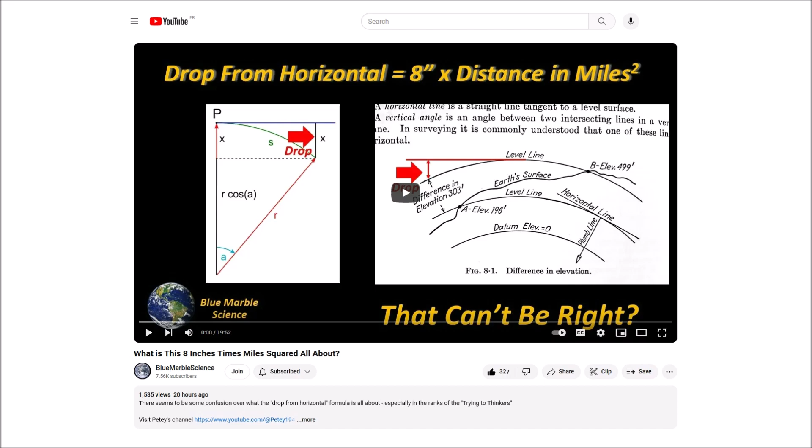Okay, so we're back to the half mile. Well, if you add those two together, you end up with 4 inches. But if you start from one point and go the whole mile, you have 8 inches. So that's a good point, whoever said that. I think it might have been me.

Uh-oh. Bev's trying to pull into the lead here. He said something incredibly stupid, and he's so proud of it, I'll bet he plays it again.

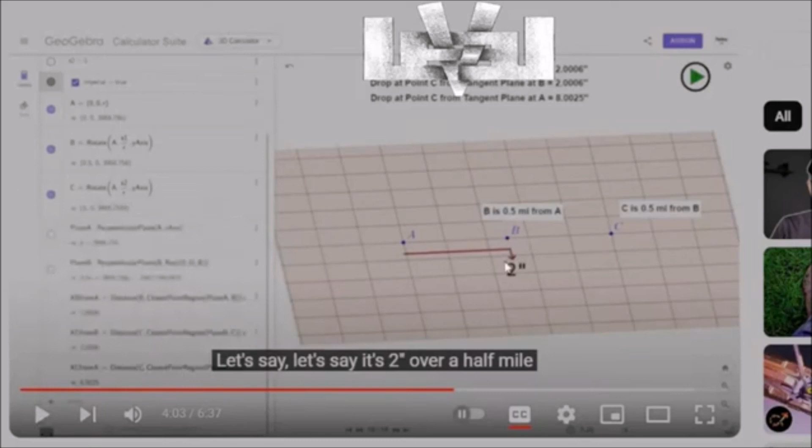Right, so here we go. We've got from A to B to C. 2 inches over a half mile. So 2 inches over the first half mile. And that's the same for either of these, right? He should have left that one in there. Well, if you add those two, see, another 2 for the other half mile. Together, you end up with 4 inches. 4 inches, yeah. Now, this one here, from A to B, should stay there, because that doesn't change. That stays at 2, right? Because it's still a half distance for the full thing.

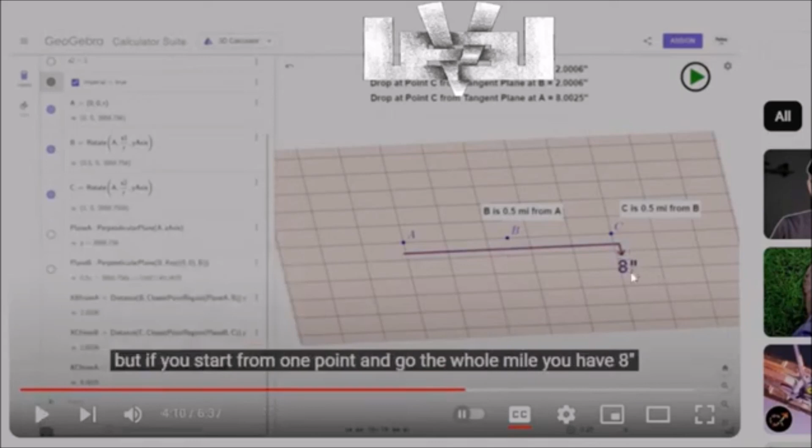But if you start from one, see that 8 inches, 1 point and go the whole mile, you have 8 inches. So there's a difference of 4 inches, isn't there? Between 4 and 8. That would be a difference of 4. Yep. He's right there, right? Now, did Petey do that maths right, or did I do that maths right? Does 2 2s add up to 4? And, yeah. 4 isn't 8. And this is what I was pointing out. This is literally what I was pointing out. That you know, there's a difference of 4. Now, how did that happen? Where did it come from? Who knows?

Thank you, Bev. Now we're going to take a look at a couple of little diagrams that I hope will clarify some of the confusion I hear there. For a start, I want to reiterate a couple of points. First of all, the equation 8 inches per mile squared is an approximation, useful over short distances. And by short distances, I mean basically distances that you can look with your naked eye. So standing out on the beach, looking out over the ocean, you're looking several miles. Go up on a high hilltop overlooking the ocean, you can see many more miles. That kind of a distance. I'm not talking about thousands of miles. So it's an approximation, but for most purposes, it works fine over those kinds of distances.

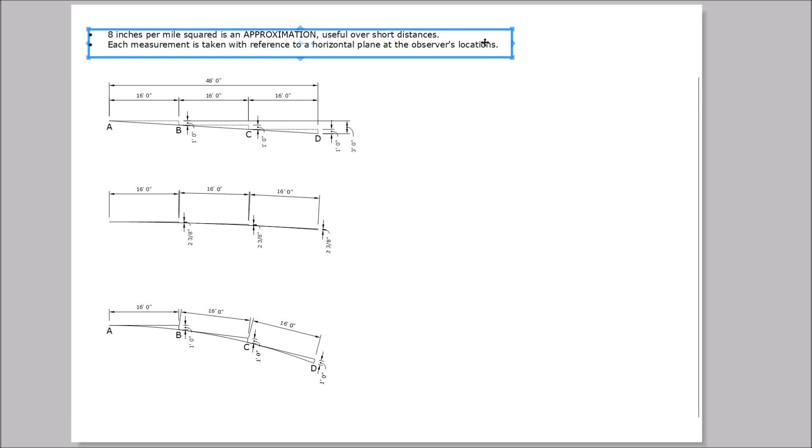Second, I want to clarify, each measurement is taken with reference to a horizontal plane at the observer's location. And I have a typo there, which I'm just going to go ahead and fix. Singular location. Each measurement is taken with reference to a horizontal plane at the observer's location. And I'm going to clarify with another picture exactly what I mean by a horizontal plane at the observer's location.

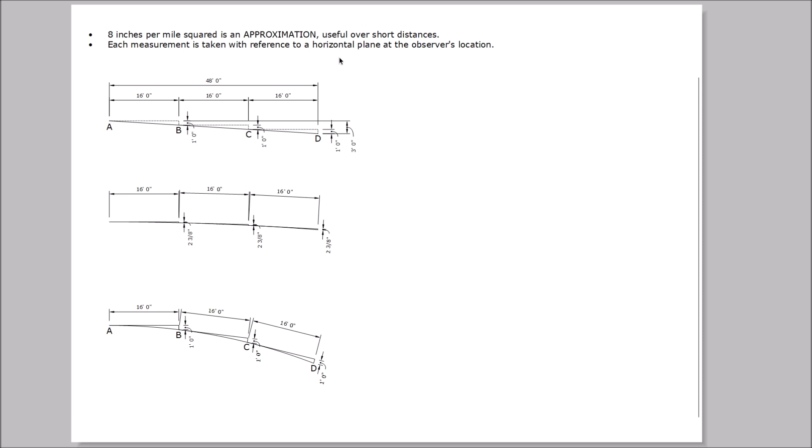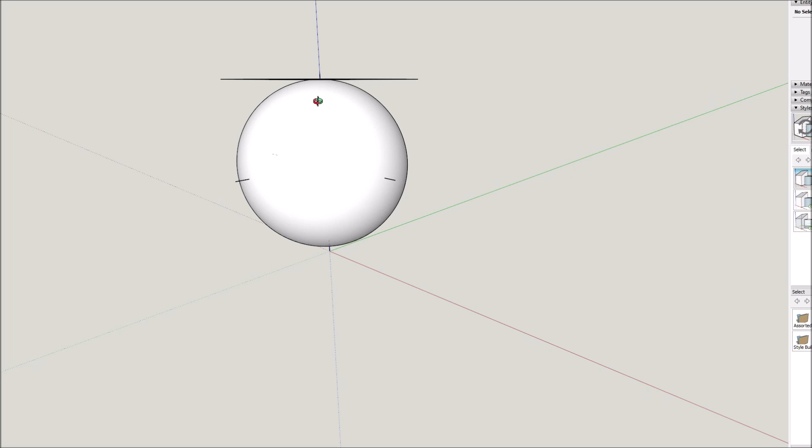Okay, we have a sphere. We're looking at a sphere here. And I have drawn a plane. And I've made that plane tangent to the sphere at one point. So you can see that they just touch. And what that means is that there is 1 point on this sphere and only 1 point, which is shared by this plane here above it. That's what makes this plane tangent to this sphere. And that point is where our observer is standing. And this plane is the horizontal plane that we're talking about when we're measuring drop.

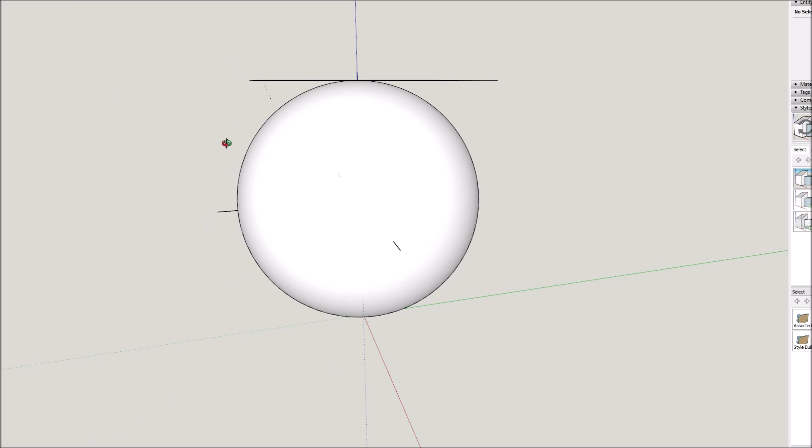Now, we're accustomed to thinking of north as up and south as down. And from the way I've made this model, we would be imagining that this is a person standing at the North Pole. But it doesn't have to be a person standing at the North Pole. So I'm going to fiddle with this a little bit.

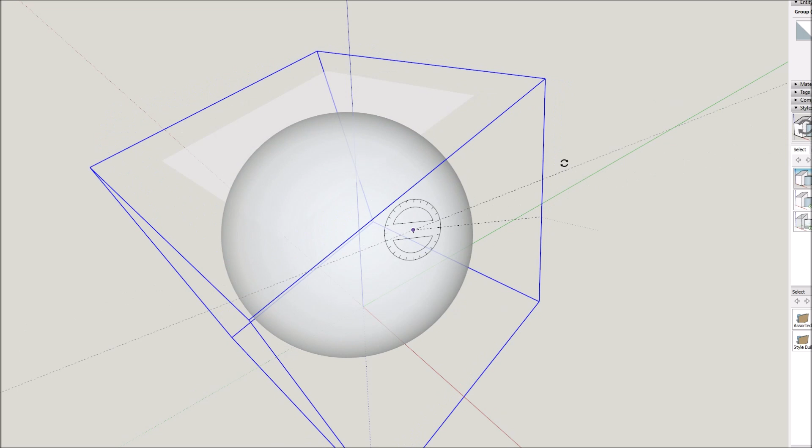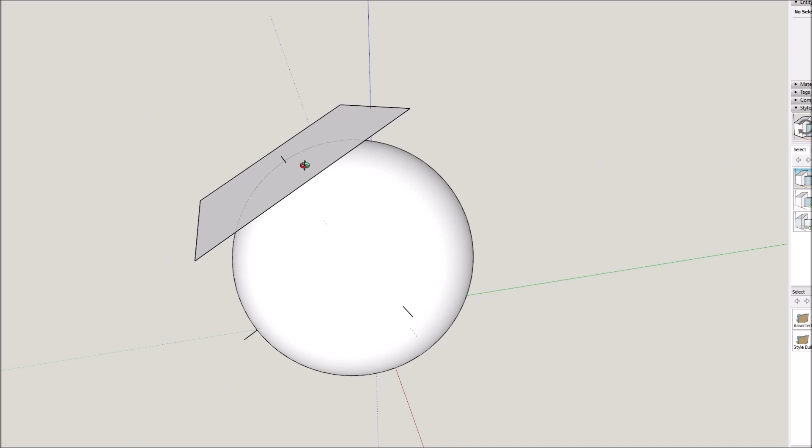So now we're looking at the same sphere, the same plane, but it's somebody standing at some northern latitude up here. And that is their reference horizontal plane. To them, that's the plane that is horizontal at their location. So I hope that makes it clear what we mean by horizontal plane.

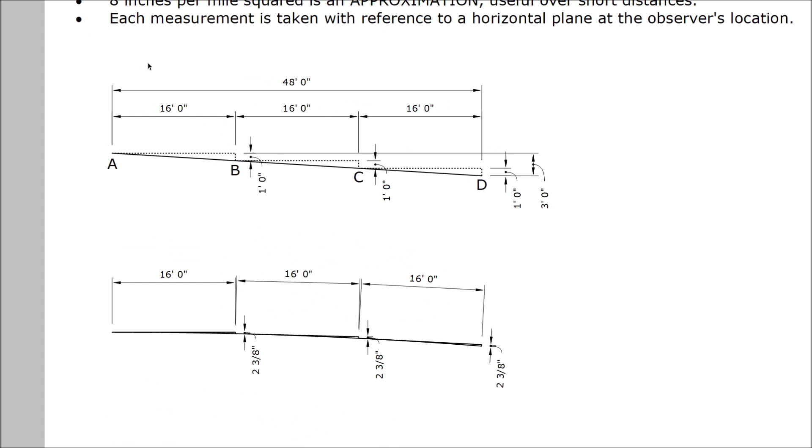Now back to our other diagram. Let's start with this one at the top here. Look at the heavy solid line that's sloping down to the right. That is a smooth, even, consistent downward slope. It's a straight line sloping down.

You can imagine you might be standing at point A, for example, on the left here, and it's a road, and it's a very nicely graded, smooth road that slopes down, going down a hillside. You might see roads like this. You might see railroad tracks that are on smooth grades like this. They like to do that with trains. Also, for example, a wheelchair access ramp could have a very even, consistent downward slope like that.

So you're standing at A, and you're looking towards point B, and you decide you want to know how much it's dropping from your point A. So your horizontal reference plane is this dotted line here where I'm moving my mouse between A and B. And you measure out 16 feet, and you measure a vertical, a plumb line from that point straight down to the ground, and that drop is 1 foot.

And then you decide to repeat that process, starting at point B and going towards point C. Again, 16 feet, and again you measure a 1 foot drop. And you do that a third time just for good measure. Starting from C, you go towards D, 16 feet, and again you measure a 1 foot drop.

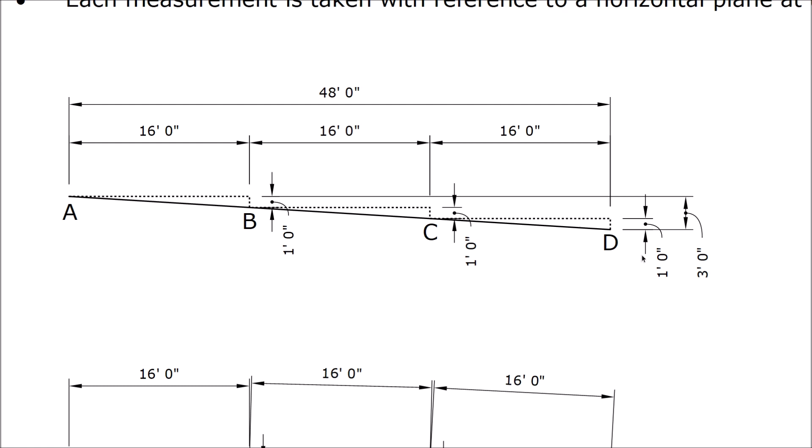Here we see a portion of a circle, portion of a sphere. And again, we've got A, B, C, and D. And again, we'll start at A, and we will measure along a horizontal plane from our point A out a certain distance. And we measure 16 feet, and we measure a drop of 1 foot, just like we did before.

Now we go over to point B, and we repeat that process, but this is where things change. The horizontal plane at point B is the plane that's tangent to the sphere at point B. That's not the same as the tangent at point A because we've curved. So the tangent to point B is this line going from B over towards C, where I'm moving my mouse. That is the tangent to B.

We measure along that line, and again we get 16 feet. And then we measure our drop, and again we get 1 foot. And now we're going to repeat that one more time, starting at C. And again, our new horizontal is the tangent at C, coming out towards D. And again, we measure a 1 foot drop. So we've measured three 1-foot drops and three 16-foot distances.

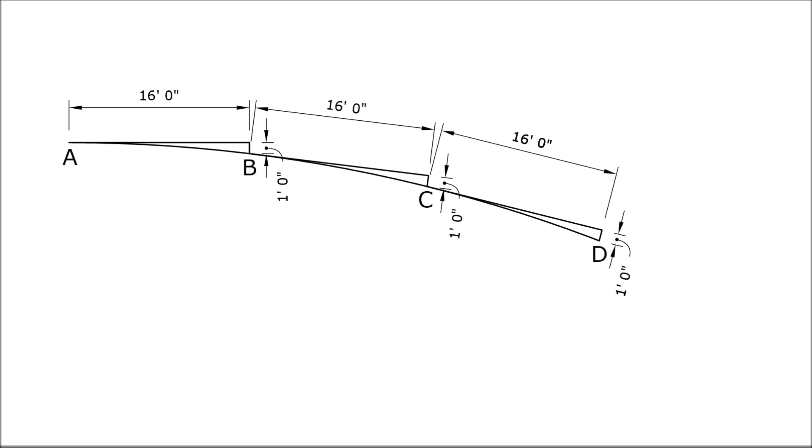Okay, so here goes. From A to B, we get 16 feet. We measure a 1-foot drop. Now I'm going to measure from A to C. A to C. We don't get twice what we measured before. We get slightly less than twice. Twice would be 32 feet. We're 1.5 inches short.

Now let's measure horizontally from A all the way out to D. Again, we don't get 3 times our initial measurement. That would be 48 feet. Instead, we get a little less than 48 feet. Now let's look at the drops. Measuring from A to B, we get a 1-foot drop.

Measuring from A to C, our drop is now 3 feet 11 5/8 inches, so almost 4 times what we measured at B. And if we do that again from A all the way out to D, we get 8 feet 10.5 inches. That's almost 9 times. So you can see that these don't just add up to match the last one. Same goes with the horizontal dimensions. They don't just add up to match the last one.

When you're looking at a curve, because your tangent is not parallel at B and C to your initial location, they're dropping and dropping. The total drop is more than just the little bits in between. You have to account also for that change in the tangent.